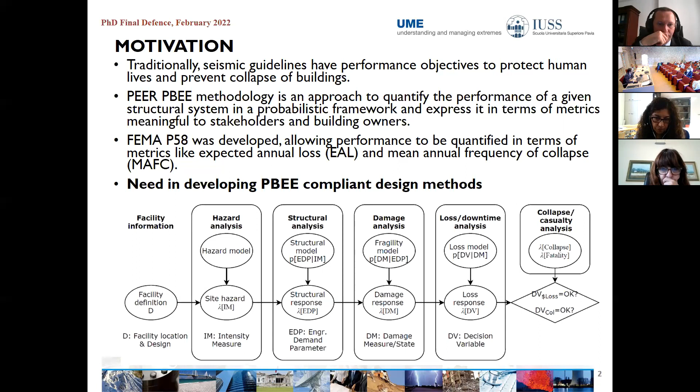Therefore, there is an immediate need in developing PBEE-compliant design methods, which this thesis will be focusing on. The goals of the thesis are to demonstrate the applicability and implement risk-targeted, loss-driven design methods in line with PBEE objectives. In particular, a framework is developed within the thesis to obtain seismic design by limiting economic losses and targeting collapse safety.

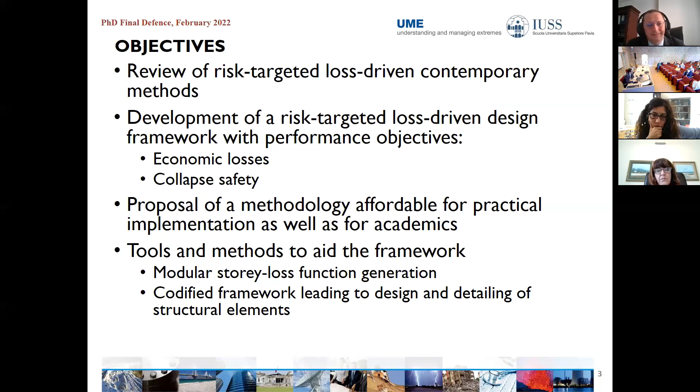A methodology is proposed that is affordable for both practitioners and can be implemented for academics as well. Additionally, Python-based modular applications were created together with a story loss function generation framework and codified, leading towards traditional design and detailing of structural elements.

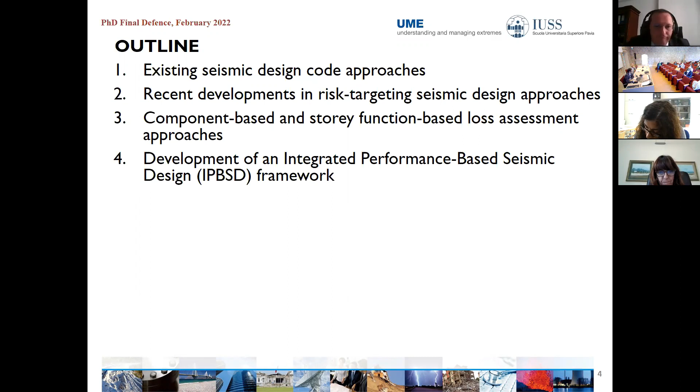In line with the main objectives outlined, the thesis is structured in several chapters. Here we will first have a look at existing seismic design code and recent developments in risk-targeting seismic design approaches. Next, we will discuss some of the approaches to deal with loss assessment, that is the component-based and story function-based approaches. And we will propose the developed integrated performance-based seismic design framework.

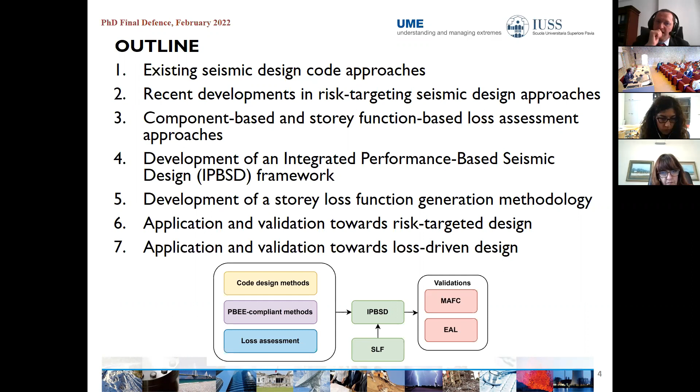To aid that, the story loss function generation methodology was also developed and implemented. Finally, the framework was applied and validated towards risk-targeted and loss-driven design.

Let's first have a look at some of the design code approaches. Traditional methods primarily focus on ensuring life safety of buildings by preventing collapse. Additionally, performance at frequent levels of shaking is checked and verified.

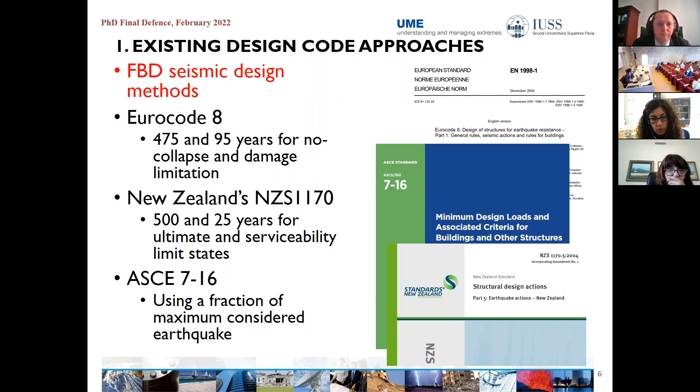Those are some of the design code approaches, and most of the design methods utilize what is termed as force-based design, or FBD. It is based on a calculation of a design base shear force. Despite the codes having an option to use nonlinear time history analysis, it is considered computationally too expensive at times, and therefore, given the availability of simpler linear methods, those are avoided.

While FBD boasts an attractive simplicity, several shortcomings have been pointed out. Displacement-based design was advocated where deformation demands drive the design process. One of the main arguments was that it is not reasonable to quantify expected ductility and spectral demand reduction factors through unique behavior factors. A proposal was made to use a ductility and typology-dependent spectral reduction approach.

Both force-based design and displacement-based design solutions are good approximations for initial seismic design of structures. However, neither explicitly are risk consistent without any further modifications towards them. And performance parameters like economic loss, downtime, or collapse risk do not explicitly feature in the design process.

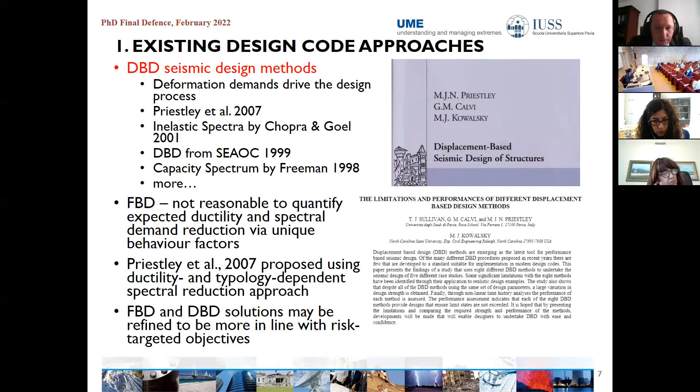Having seen the traditional methods, let us discuss some of the recent developments in risk-targeted approaches. Any risk-targeted approach aims to control risk of exceeding a limit state related to the performance of a building. Here we provide a critical discussion of some of the available methods in the literature, as well as the proposed framework termed IPBSD. However, this is not exhaustive, obviously, and more capacity design methods are available to the reader.

Inspired from the performance-based seismic design notions, seismic classification of structures was formally introduced and implemented, which is a very important leap towards codification of such approaches.

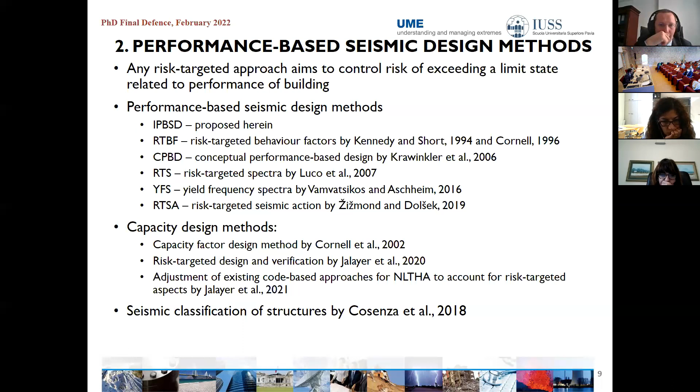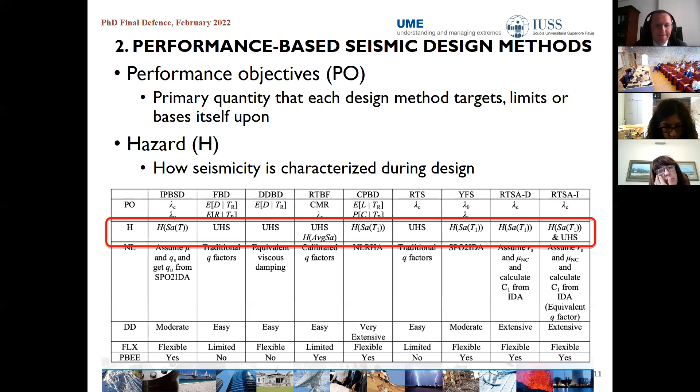With regard to nonlinearity, how ductile structural behavior is accounted for in different methods, some of the traditional and risk-targeted approaches use behavior factors or viscous damping, while other conceptual and risk-targeted approaches use very extensive nonlinear time history analysis, together with some assumptions regarding the backbone shape of a structure.

The yield frequency spectra method and the proposed framework use what is called SPO2-IDA tool to derive a dynamic behavior of the structure before running any type of analysis.

With regards to relative difficulty and directness, methods that are quite direct are considered easy, while the others, that is some conceptual methods and risk-targeted methods, are considered very extensive or extensive due to the use of some iterations and involvement of nonlinear time history analysis during the design and identification of design solutions.

In contrast, the proposed framework and the yield frequency spectra method do not use nonlinear time history analysis, but there can be some iterations involved.

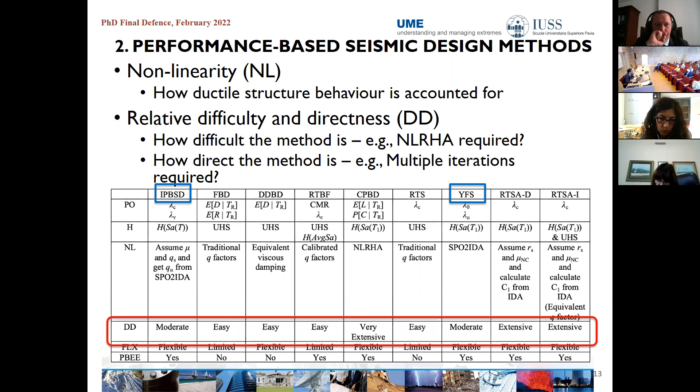With regards to flexibility, again, this is based on some subjective opinion. Here, behavior factors are used in some methods. Some methods are considered limited, as there is nothing left for the designer to do, while others are flexible, as the designer can tailor their design targets beyond what has been developed for so far.

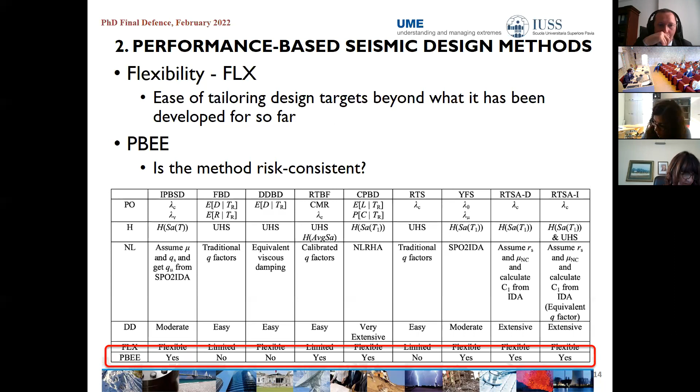Lastly, the methods are categorized as PBEE compliant or not, and as you can see, the traditional methods, and some of the risk-targeted methods, are considered non-risk consistent, while the others are.

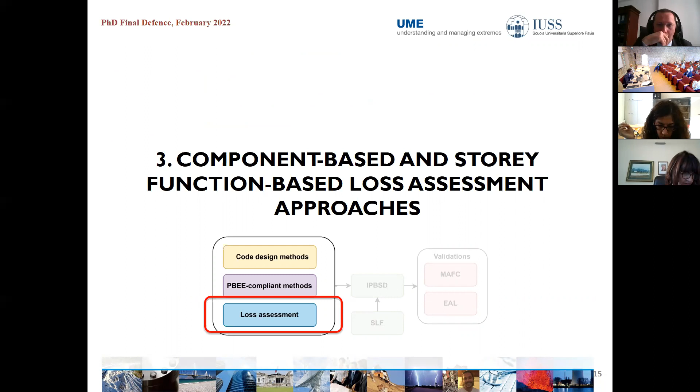Having seen all the different design approaches, now let's look at loss assessment frameworks. In particular, the component-based approach was used within the thesis, which is basically a rigorous methodology requiring full building inventory, along with fragility and consequence functions for each damageable component.

Here, decision variables are the deaths, dollars, and downtime, and the toolbox termed PACT was developed for ease of its application and assessment of losses. Due to its complexity, it is still considered quite discouraging for practitioners to apply.

An alternative approach is the use of story loss functions. Here, the assessment is carried out on a story level rather than component level. Also, these are easier to generalize before starting the design, depending on the structure's functionality or typology.

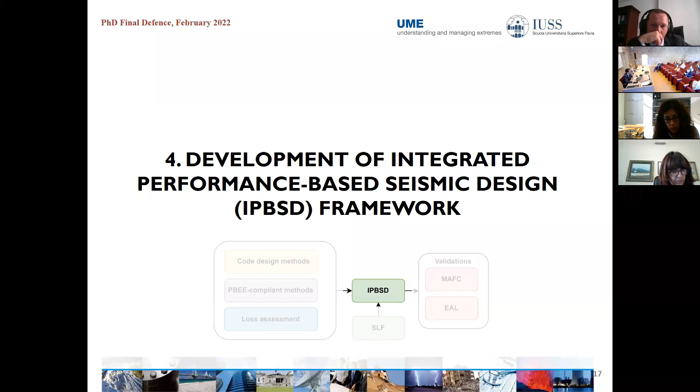With good understanding of current design methods, a framework is proposed for risk-targeted and loss-driven seismic design. As we already saw, traditional methods are easy to implement, but they are not risk-consistent, while in contrast, the PBEE-compliant methods are complete and extensive, while complex to implement.

Therefore, we decided to propose a framework that is both suitable for academics and practitioners and traverses the constraints of both types of methods, making use of the advantages of both to make it applicable.

So this is the framework architecture. The steps are detailed, and before embarking on further details, it is important to visualize the framework as a whole with some general sense. While preliminary building information is required in pretty much any methodology, here we also need information on site hazard, and performance objectives need to be defined.

Additionally, the framework is applied on a story basis. Therefore, story loss functions need to be defined for loss calculations. First, we define the loss curve. Here, parameters regarding different limit states are computed, and based on those, engineering demands are computed and refined.

The next stage involves the design spectrum definition, and design engineering parameters are transformed to spectral coordinates for the purpose of computing a feasible period range for the building. Here we ensure that the losses will not be exceeded by the final structural configuration.

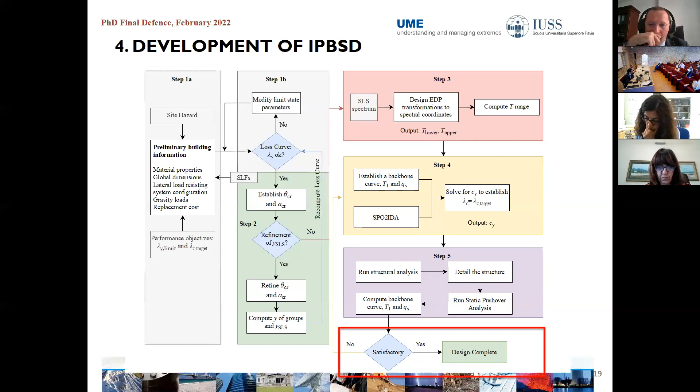Finally, if all performance objectives are satisfactory and detailing requirements have been met, we can consider the design complete. And this is the graphical illustration of the flowchart of the framework.

In the first phase of the proposed framework, we identify a suitable loss curve, which is identified through expected loss ratio and mean annual frequency of exceedance.

Several limit states might be considered, however, only three are considered within this thesis. Those are the operational limit state, where we essentially define initiation of damage and loss; the serviceability limit state, where losses are controlled; and the collapse limit state, where complete collapse is expected.

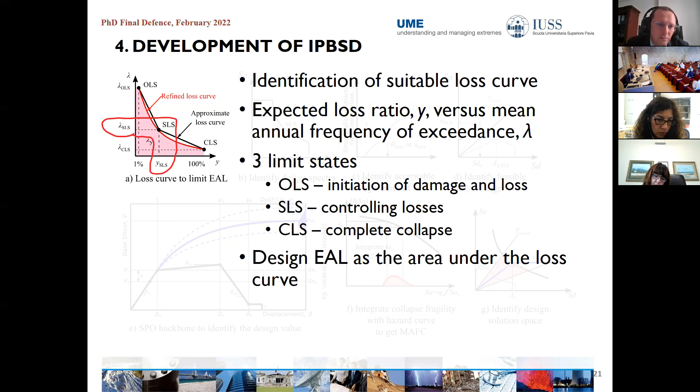The design expected annual loss is basically the area under the loss curve. Additionally, the SLS parameters are calibrated so that the EAL does not exceed the input of the designer, and those parameters are later used for the computation of the design spectrum and engineering demand parameters.

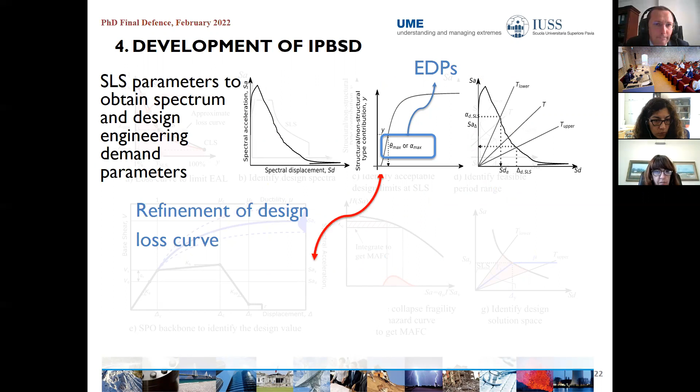With engineering demand parameters computed before establishing the feasible period range, some refinements can be carried out for more precise results and a definition of a loss curve. By doing so, we can identify the feasible period range.

This is where the structure's initial, secant-to-yield period must lie. Essentially, by giving period limits, we are ensuring that the losses associated with acceleration-sensitive components will not be exceeded due to the structure being too stiff, and the structure is not supposed to be too flexible, so that the losses due to displacement-sensitive components will not be excessive.

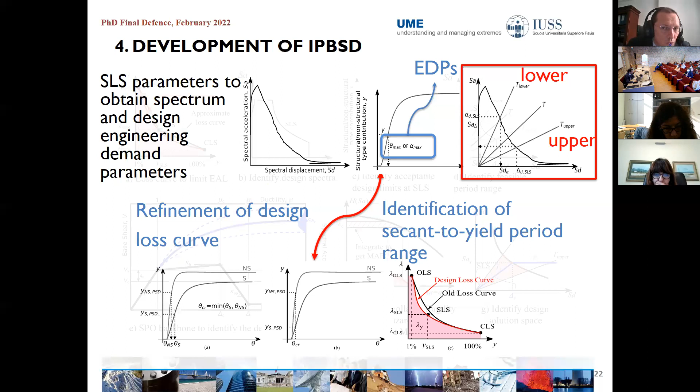By controlling for losses, now it's time to control for collapse safety of the structure. Here, again, several assumptions have to be made regarding lateral strength of the building and ductility. This is an iterative stage where, together with SPO2IDA, we estimate the collapse capacity of the structure, and the lateral strength is computed as a function of this.

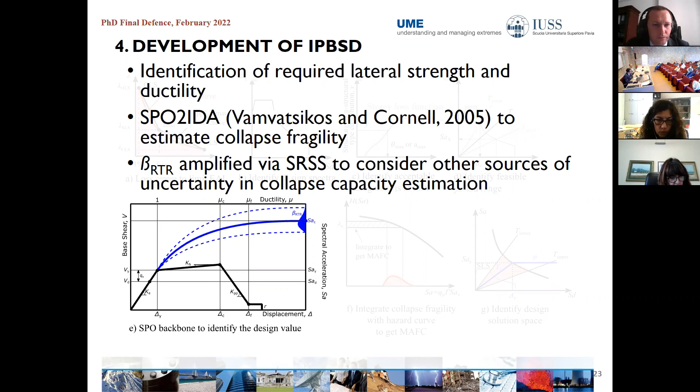By using the collapse capacity function and integrating with the hazard curve, we can compute the mean annual frequency of collapse, and this process can be applied multiple times within the framework, resulting in identification of a design solution space. Essentially, all design solutions within this range are ensured and satisfying the procedures for the computation of mean annual frequency of collapse.

Are valid design solutions. Finally, based on this and using the lateral strengths of the building, we can use design codes for detailing of the structural elements.

In essence, serviceability limit state design leads to control of expected annual loss, while optimization of mean annual frequency of collapse by means of the use of static pushover analysis or SPO2IDA leads to satisfying collapse safety and performance objectives.

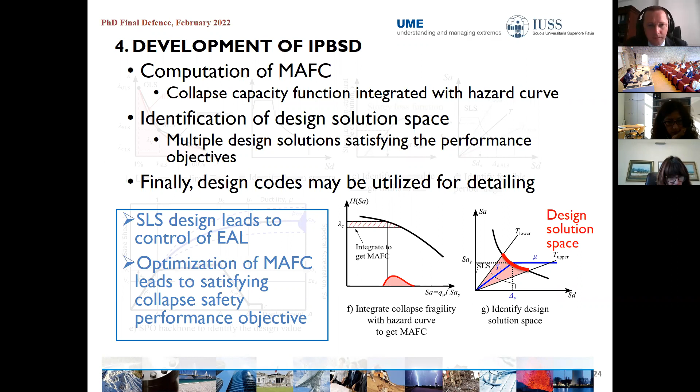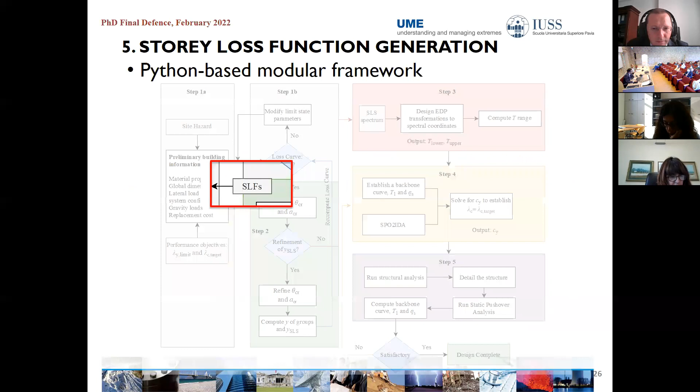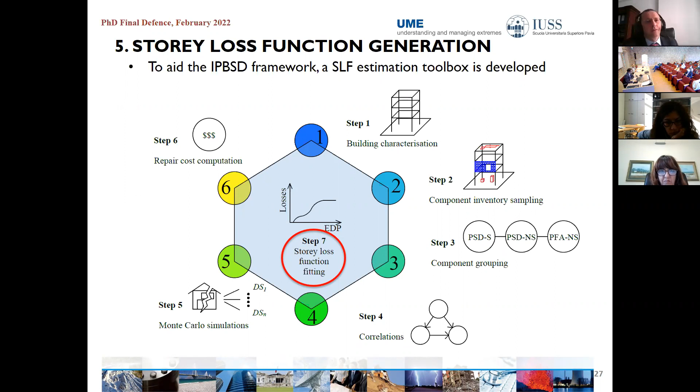So within the thesis in particular, but also to aid seismic design and assessment in general, an SLF estimation framework was developed. The framework consists of building characterization, component inventory sampling, grouping, consideration of possible correlations among the components, application of Monte Carlo simulations for damage state sampling, based on which repair costs are computed, and finally, by using, for example, the medians of the repair cost, a story loss function may be computed through regression.

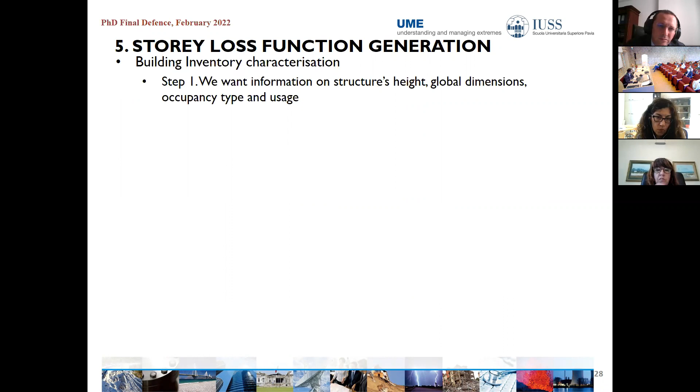Now let's have a detailed look at the steps. The first step involves the building inventory characterization. Here, the designer needs information on the structure's height, global dimensions, occupancy type, and usage. Next, the inventory is identified where component types are defined, quantities, as well as the demand parameters or other necessary metrics.

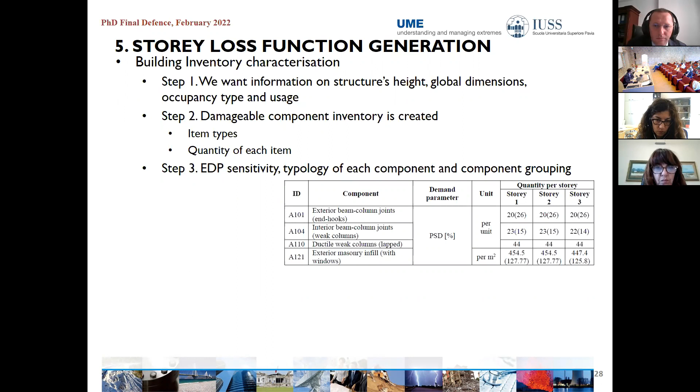Then, once all inventory is created, depending on the component's engineering demand parameter sensitivity and typology, they can be grouped into different performance groups. Only three have been considered within the study, however more can be added with ease due to its modularity. Those are the peak story drift sensitive structural components, PSD sensitive non-structural components, and peak floor acceleration sensitive non-structural components.

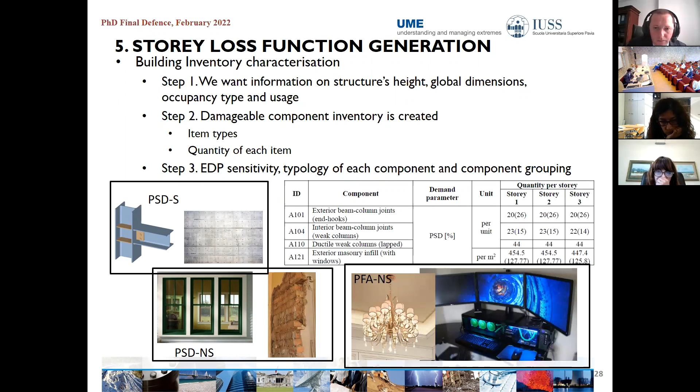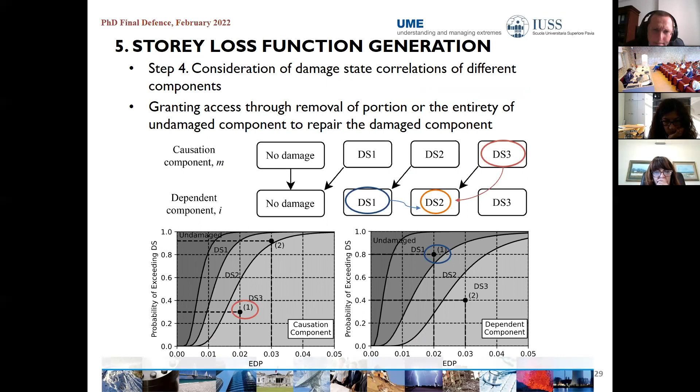Possible correlations of damage states may be considered for structural and non-structural components of the same performance group, given some correlation matrix. The figures demonstrate an associative example of two components whose fragility functions are correlated. For example, a causation component, let's say it has been assigned a damage state 3 through simulation, and the dependent component was assigned a damage state 1. In this case, the damage state of the dependent component will be pushed to 2, resulting in larger repair costs.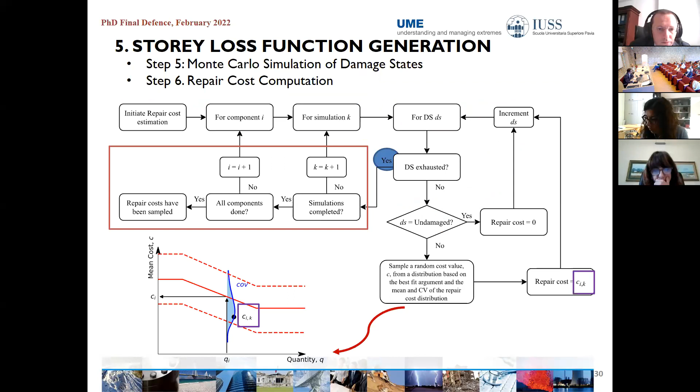Next, Monte Carlo simulations are applied for the sampling of damage states based on which repair costs are computed. This is carried out at each simulation step and for all components using consequence functions. So basically, using the quantity of the component and based on the distribution of the cost, a random value is sampled from the distribution for a specific simulation and assigned to a component. By doing so, for all components, we get the repair cost distributions.

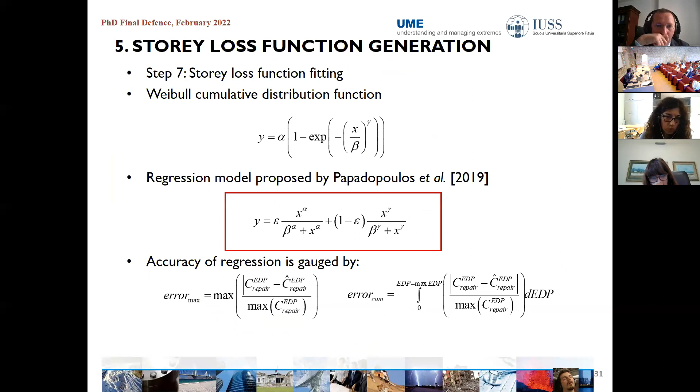Then by using the median values of the distributions, for example, we can select a regression model and compute the story loss functions. This is the example application of the framework. Here we have some story loss functions, as well as the graphical user interface of the framework, along with some architectural modules. And this is done in Python and is freely available on GitHub.

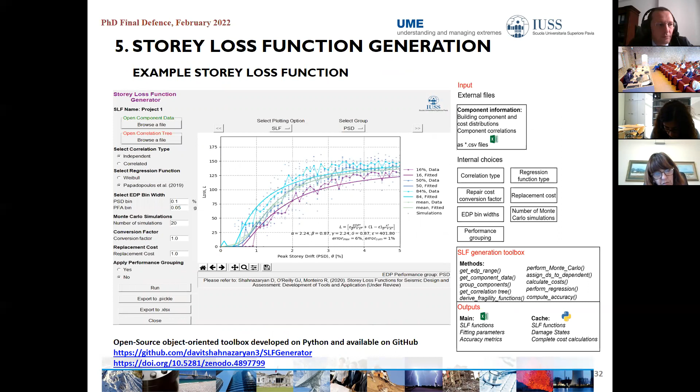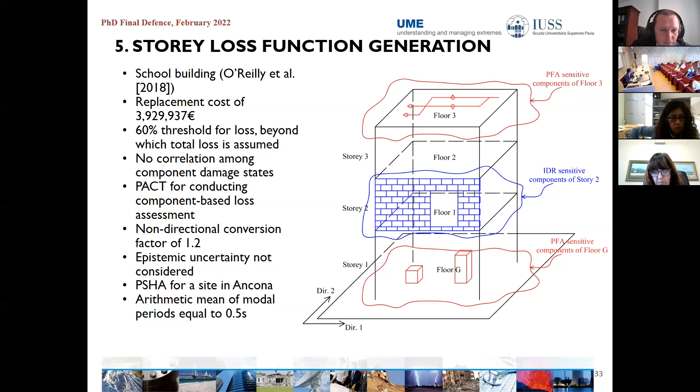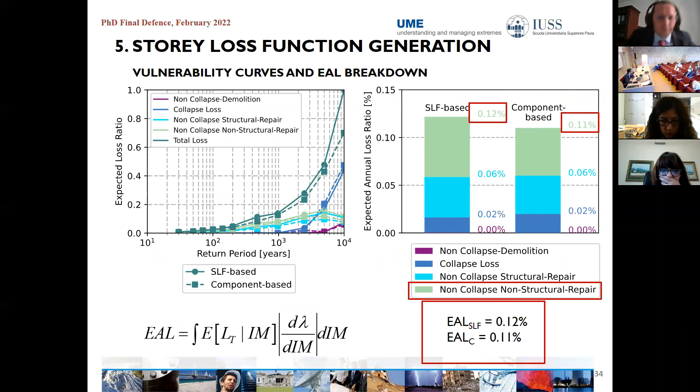What regards the results, here we have the vulnerability curves and the expected annual loss disaggregation results. As you can see, the results are matching quite well, with a significant portion coming from non-structural components. Similarly, the following figures provide the relative contributions to the vulnerability curves as a function of return period. As observed, the main contributors at frequent events are the non-structural components, with structural repair costs coming as second.

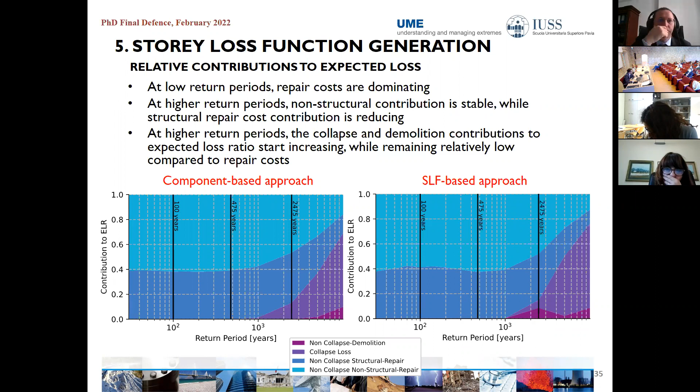While with higher return periods, we have demolition and collapse cost contributions getting larger, as expected. From the figures, again, we have quite good matching between the two approaches, which is important, as it signifies that the SLF-based approach could be applied without losing the quality of the loss assessment.

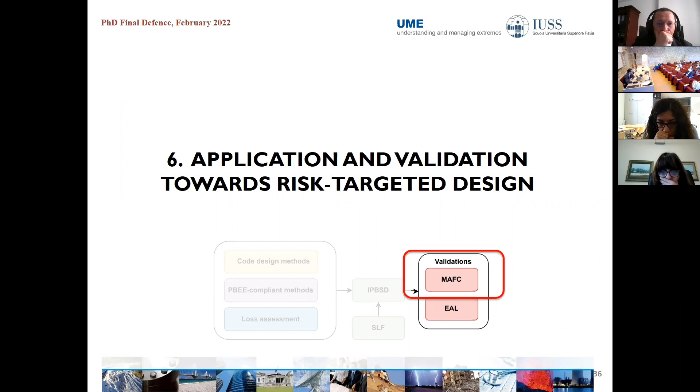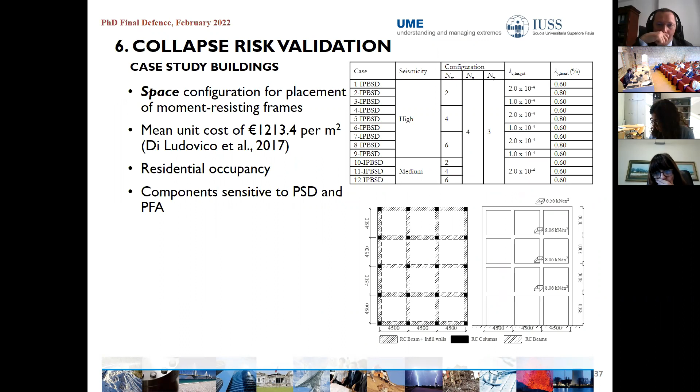With the development of story loss functions, it is equally important, if not more, to validate the proposed framework towards its performance objectives. For that purpose, a number of reinforced concrete buildings were used with a space configuration for placement of moment-resisting frames. Residential occupancy was assumed, and components sensitive to peak story drift and peak floor acceleration were used only. Additionally, two site locations were utilized, pertaining to medium and high seismicity regions.

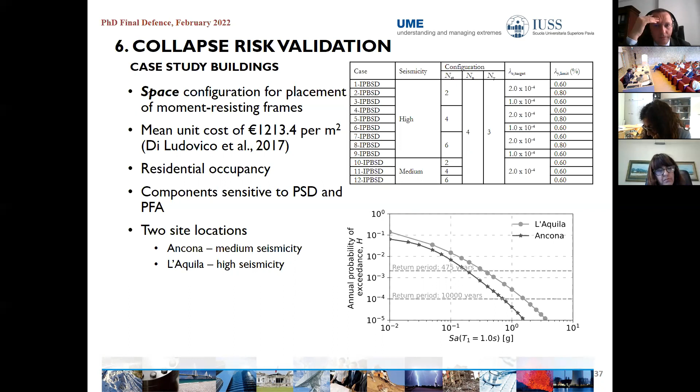With regards to numerical modeling, nonlinear models were created using OpenSees. Here are some graphical illustrations representing the models, where nonlinear element behavior was considered through a concentrated plasticity approach, and incremental dynamic analysis was carried out with the purpose of capturing collapse.

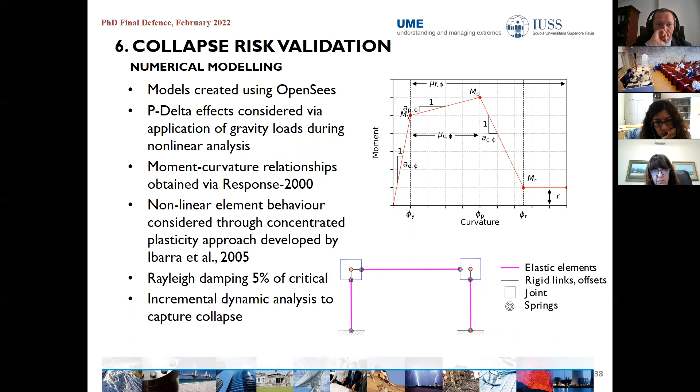Again, consistent results were obtained in each case associated with the framework. As you can see, there is a relatively narrow tolerance with respect to the limits, without any case of excessive over-design, demonstrating the proposed framework's efficiency in obtaining risk-consistent design solutions.

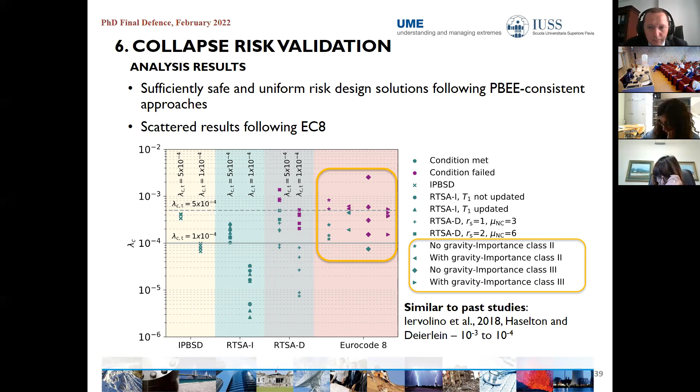Similarly, some risk-targeted approaches showed quite good results, while the cases pertaining to Eurocode show quite a lot of scatter, which is due to the fact that the designs are not risk consistent. However, it is important to note that the values obtained are quite close to the ones available in the literature in Italy and also in the US.

Similarly, expected annual losses were validated. As one may see from the results, the EAL values are satisfactory. Consistent results were again obtained in terms of this performance metric, though for some cases the results are not

quite close to the limit, which is primarily for medium seismicity regions, which could be attributed to the fact that the hazard is not strong enough to result in high losses. It could be argued also that Eurocode cases demonstrate very good results, even closer to the limit.

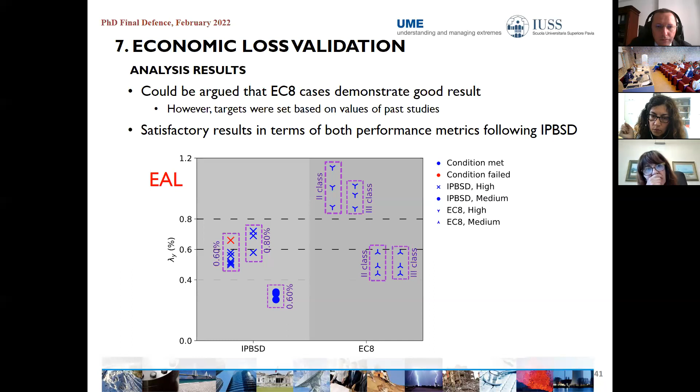However, it is important to note that the targets for the proposed framework were defined based on past values from past studies. With that in mind, further analysis of assumptions and design parameters were compared to the actual values obtained.

As seen from the figure, flexible buildings have a larger expected annual loss, which could be attributed to the high proportional cost of drift-sensitive components. Also, actual loss contributions do not quite match the design values.

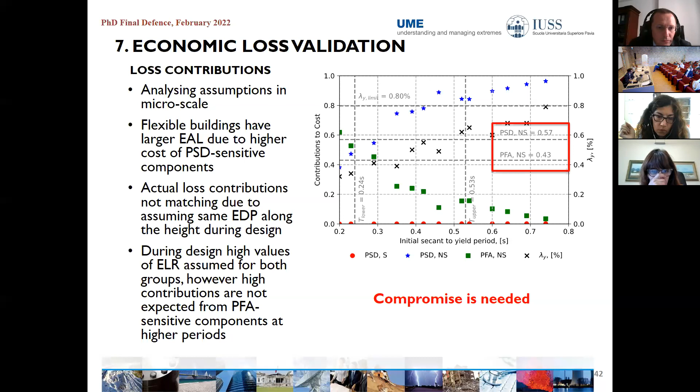This is because the design process looks for a compromise and assumes singular values for drift and acceleration-sensitive components based on the period limits, while in reality the cost will vary depending on the structure's initial secant-to-yield period.

Trying to remedy the extent of this assumption, we had a look at the EDP profiles. A decision was made to use the PSD and PFA profiles obtained after design as benchmarks to scale design EDPs and reapply the proposed framework.

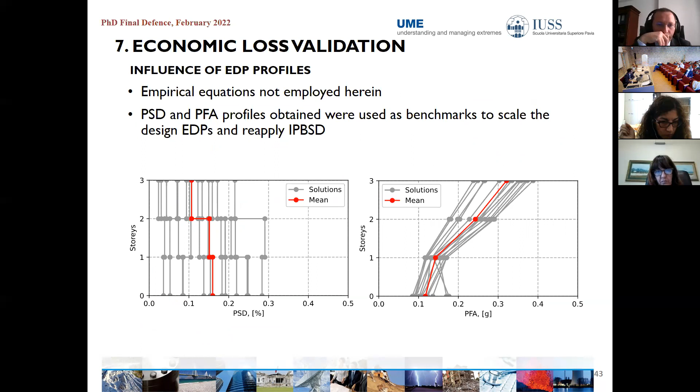By doing so, the expected annual loss limit was reduced from 0.8 to 0.6%, meaning that buildings with higher period than the upper limit are no longer satisfying the performance objective, while those within the period limits are quite optimized and closer to the limit.

This is entirely an optional step, and to ease its application, a Python-based framework was again developed to perform the optimizations within seconds or minutes, avoiding extra analysis.

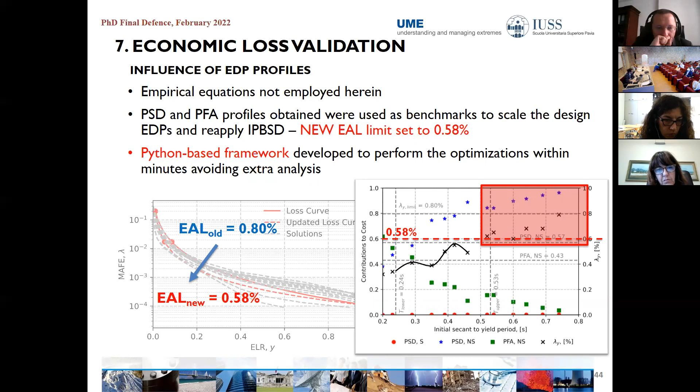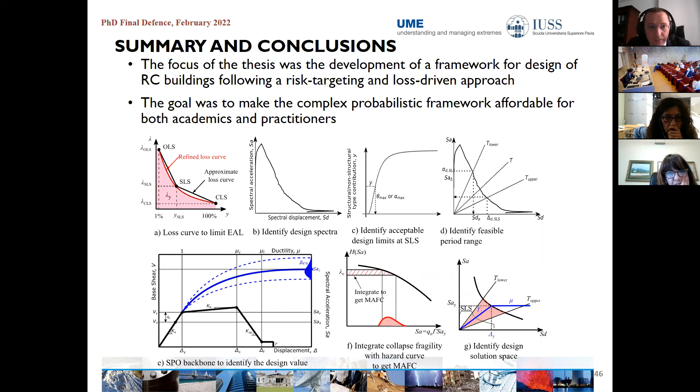To summarize, the focus of the thesis was the development of a framework for the design of RC buildings following the risk-targeting and loss-driven approach. The goal was to make complex probabilistic approaches affordable for both academics and

practitioners. We aim to fill the gap of lack of practical and customizable tools for easy implementation of storey loss functions. The framework is capable of accounting for component damage state correlations as well.

Storey loss functions were developed for buildings in Italy and compared to a component-based approach, indicating good matching. Close matching was also observed in terms of loss contributors from different performance groups and per intensity and engineering demand parameter. Additionally, these pre-generated SLFs could act as an important tool, especially for new

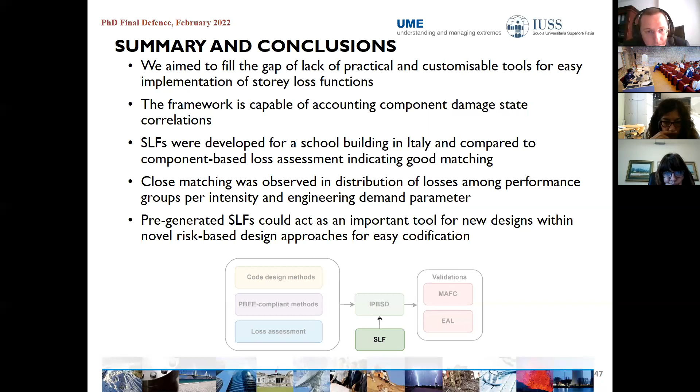designs before starting the design process, and for generalizing across a portfolio of buildings of the same typology. An integrated performance-based seismic design framework was developed and proposed. It was verified and validated through its application to case study reinforced concrete buildings. Consistent results were obtained in terms of both performance metrics, with targets being met with relatively narrow conservatism and without

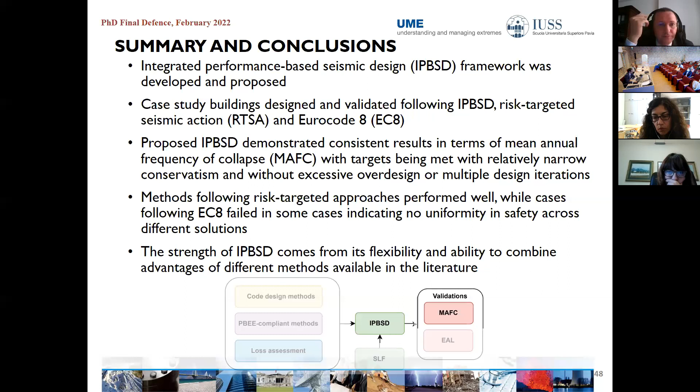excessive over-design or multiple design iterations. Methods following other risk-targeted approaches also demonstrated good results, while as expected, Eurocode showed no uniformity in safety across different solutions. It is important to note that the strength of the framework comes from its flexibility and ability to combine the advantages of different methods available in the literature.

It was also validated against expected annual loss, and a further deep dive was carried out into the assumptions involved. It was validated through application to 3D buildings using bidirectional nonlinear analysis, and it was shown through refinement of EDP profiles that more optimized results may be obtained.

Again, a Python-based object-oriented environment was created for ease of application. Some limitations and further developments could include the possible inclusion of considerations of interactions between components physically located at different stories of the building or pertaining to different performance groups.

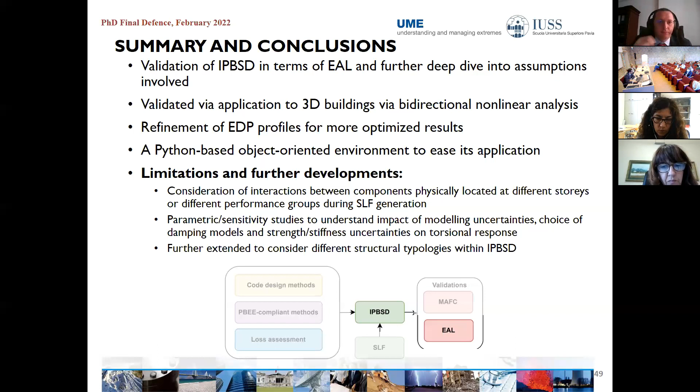Also, some parametric and sensitivity studies could further be applied to understand the impact of modeling uncertainties, choice of damping models, and strength-stiffness uncertainties of torsional response. It could also be further extended to consider different structural typologies, for example reinforced concrete walls, steel structures, and isolated systems within the proposed framework. Okay, thank you.

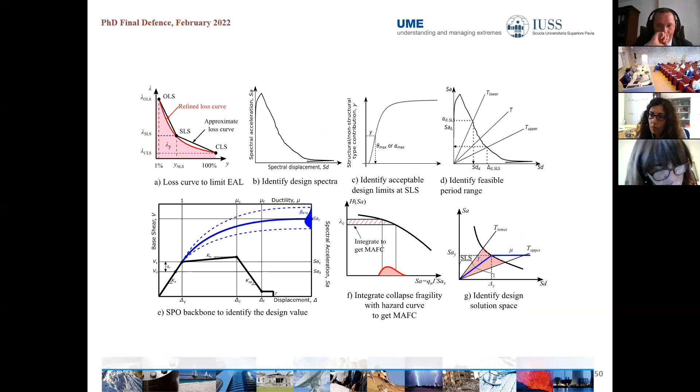Thank you, Davit. You saved us 2 minutes. Well done. Okay, so we'll open the discussion.